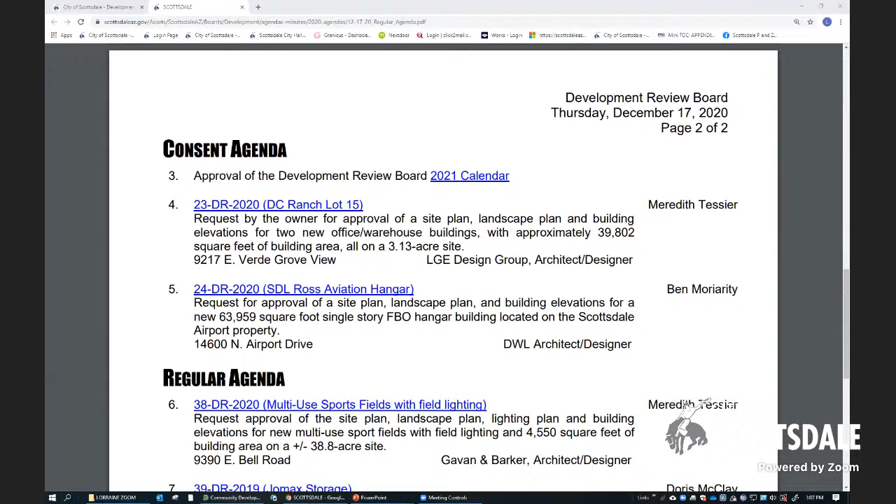Thank you. All right, we'll move on to the regular agenda, and we have item number 6, which is 38 DR 2020, multi-use sports fields with field lighting.

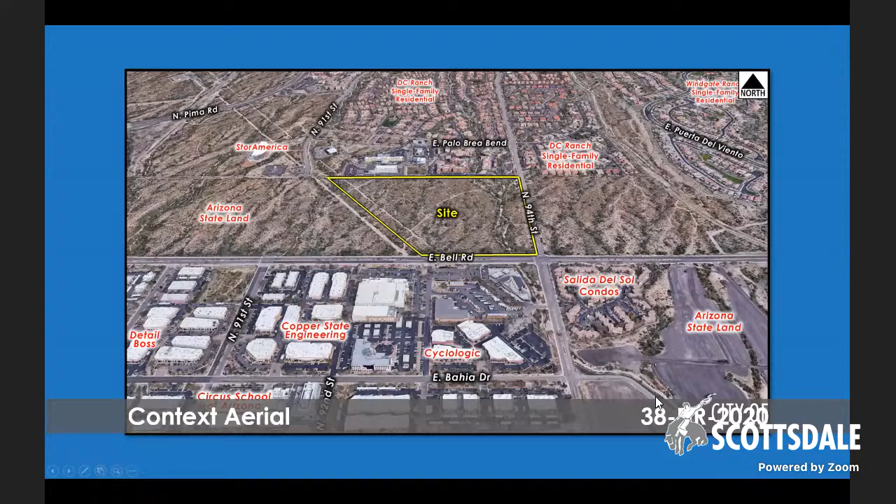Next slide please. The subject 38-acre parcel is located at the northwest corner of East Bell Road and North 94th Street, as highlighted in yellow.

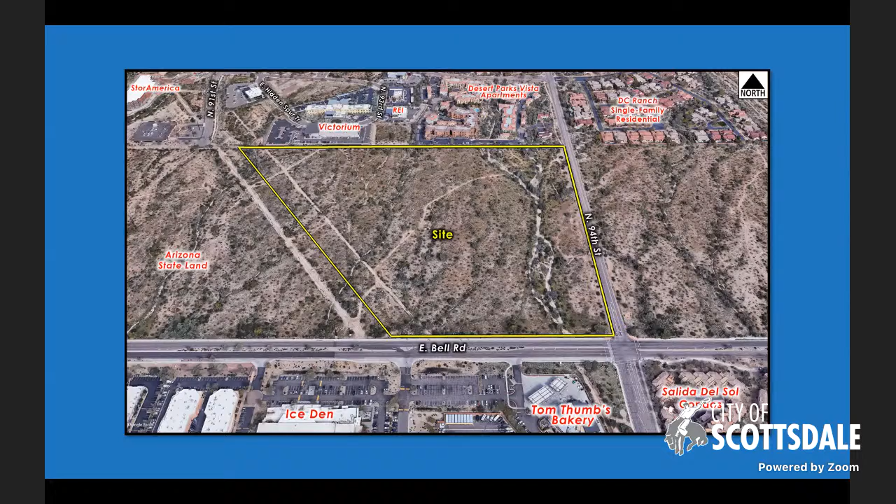Next slide please. Before you is a close-up aerial of the subject site with surrounding uses that include vacant undeveloped residential to the east, multifamily and light residential to the north, vacant undeveloped industrial to the west, and mixed commercial uses to the south.

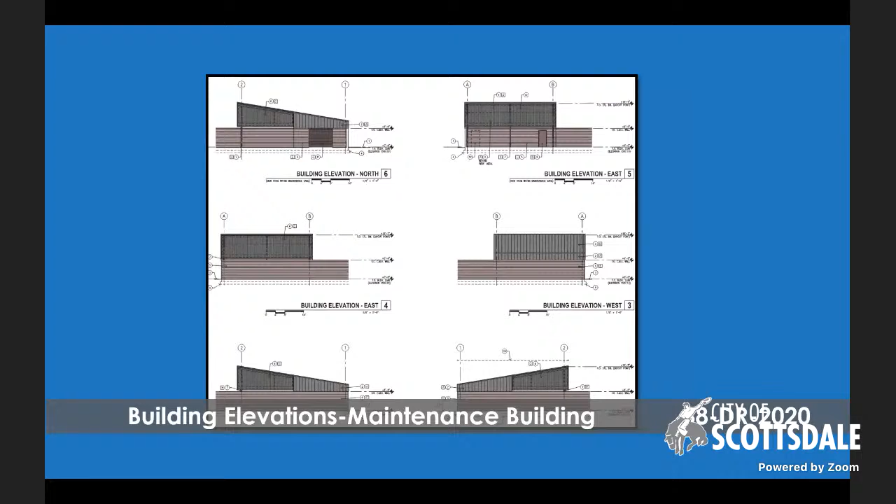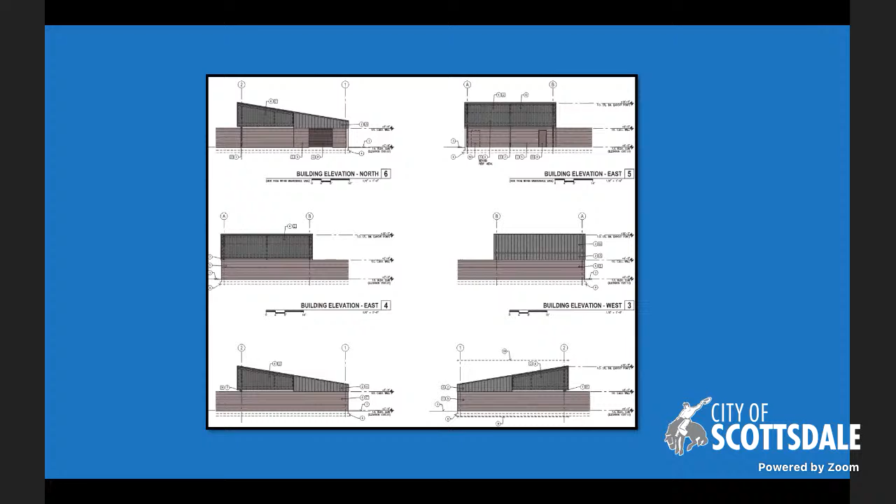Next slide please. Before you are the maintenance building elevations. Next slide. And the operation building elevations with materials and colors that are muted desert earth tones.

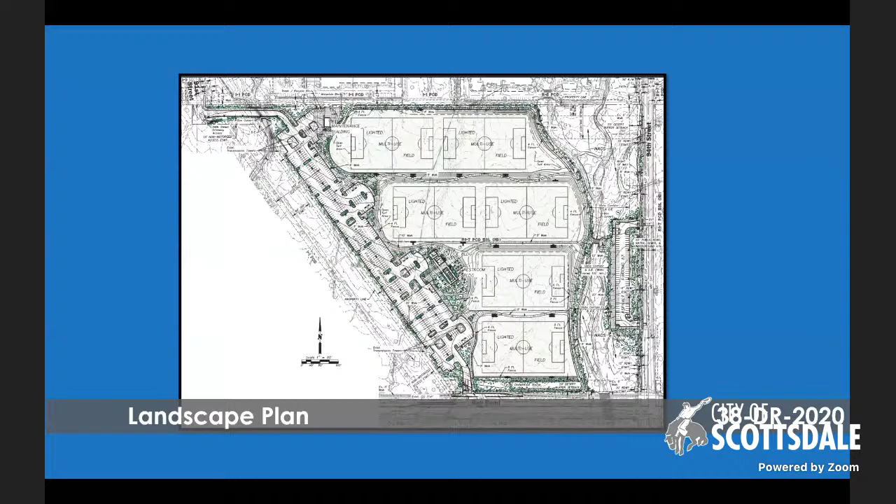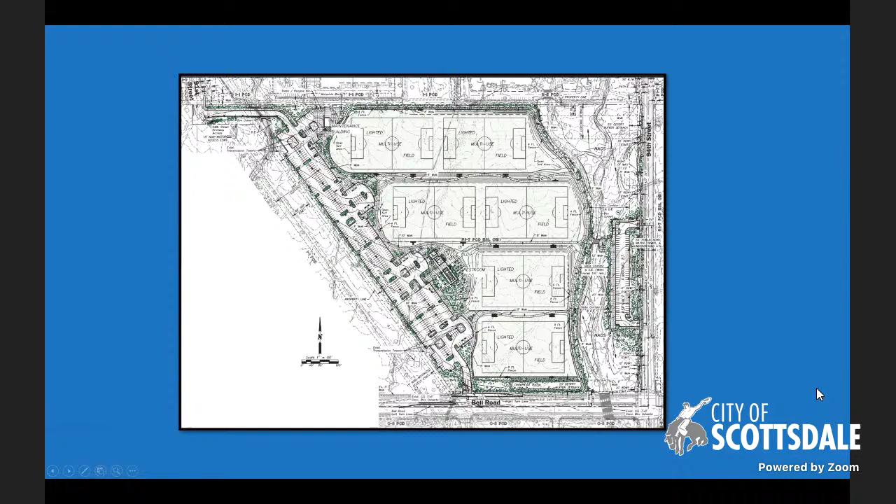Thank you. Good afternoon, board members. This is Croy Ekblaw with the City of Scottsdale. We'll be bringing up another PowerPoint momentarily here, and Lorraine, you can advance that.

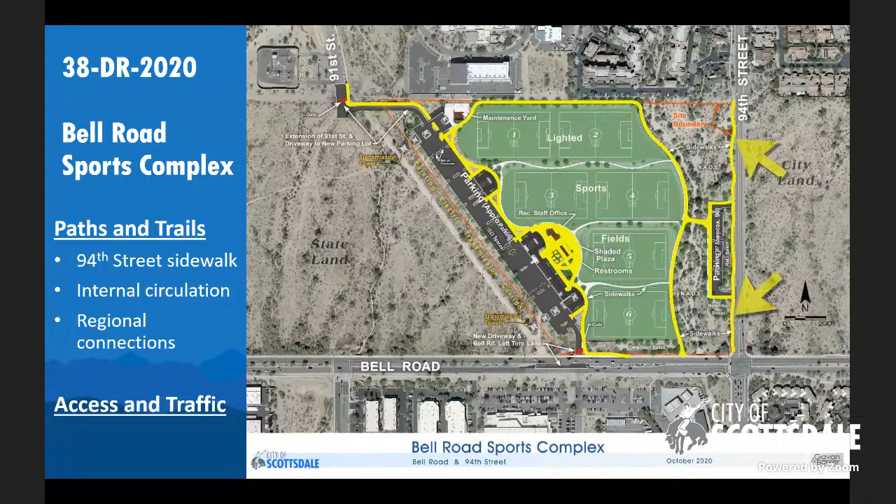Next slide. We've done extensive public input and feedback on this project, and a lot of focus was on access, traffic, paths and trails, and pedestrian access through the site. We'll have our site plan design team speak to that very briefly in a moment, but I wanted to emphasize, because when we were before the board a little over a month ago, there were some questions in particular about access and traffic.

This next slide highlights that we had Lee Engineering, one of our consulting team members, go through and do the traffic data collection and analysis, looking at traffic capacity on the surrounding streets and recognizing the offsite concerns from some of the residents.

And this next slide identifies the things that we've done. I know one of the questions last time was on the eastbound left turn lane. A typical lane would be 150 feet in length.

We're going with the 200-foot length in order to address the traffic needs, and we do believe that'll be satisfactory. The right turn lane will be a standard length, and being the city, we will continue to evaluate all traffic operations at that location, and if any amendments need to occur, we would be able to proceed with that. 94th Street, we have our access

provided without the need of decel lanes, and per public input and recent council approval of the municipal use site plan, transportation staff will be reviewing speed limits on 94th Street and monitoring pedestrian crossing interest at Palo Brea and 94th Street, which is north of the park site by several hundred feet. And then 91st Street had no roadway changes required.

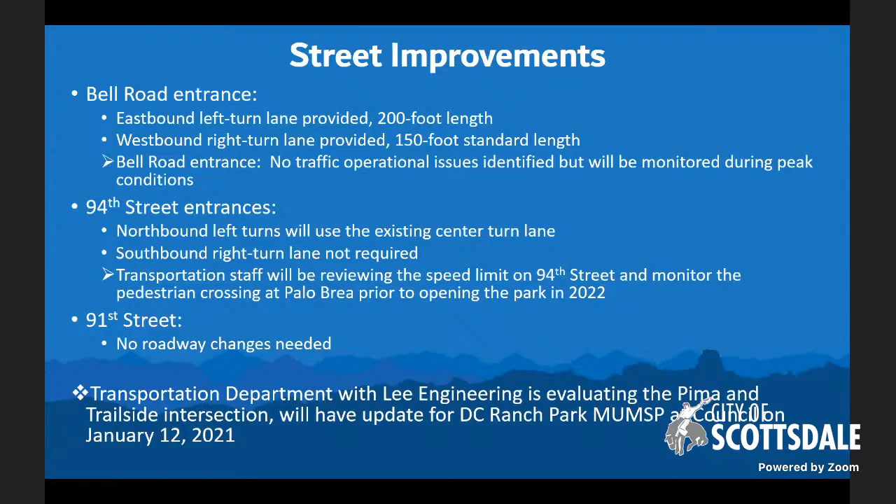So we just wanted to remind you of many of the elements that had been questions at your last meeting, and we have worked to address those as we went through the Planning Commission and City Council. The next slide then just reiterates that we've had extensive public input through a couple of open houses and all the public meetings that we've had, and the plans that are now being presented before you represent an evolution of those plans.

And with that, I'm going to introduce John Barker, who is our landscape architect and site designer on the site. John's going to take you through the next couple of slides on the site design. You go back one, please. Thanks, Croy. And members of the board, if you could please go back to that last slide.

Thanks. I know Meredith touched on several of these things, so I'll be brief, but just the main features again are the 6 soccer fields, turf fields, and the parking, approximately 600 parking spaces. The majority of it is underneath the power line corridor, and the small parking lot off of 94th Street.

We're preserving the large wash on the east side of the site, which is also designated as the Vista corridor. There's a maintenance yard and maintenance building at the northwest corner of the site. And then a restroom and staff office space centrally located within the fields.

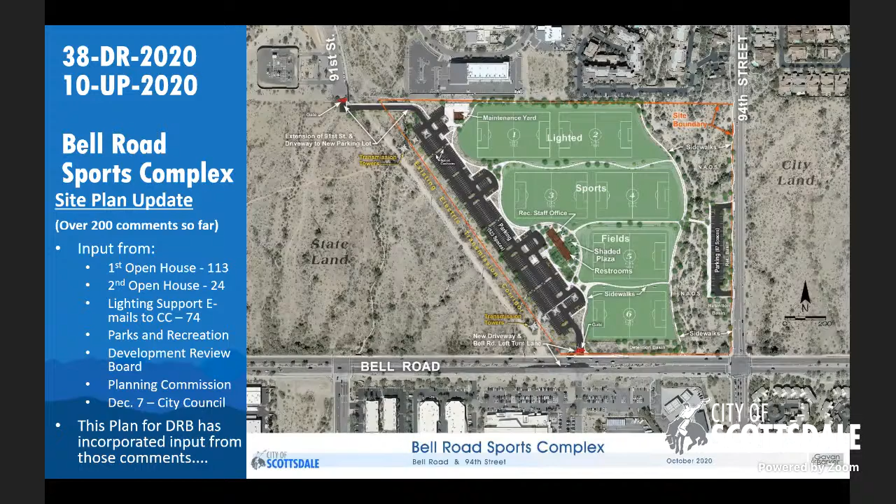The multi-use fields, the turf fields, are planned to be lighted. One of the initial concerns from the community was about the lights, and we've mitigated those concerns with the use of the latest LED sports lighting technology. The next slide shows the new technology compared to the old technology.

Some of the other comments from the public meeting were about providing a sidewalk connection along 94th Street from the north down to Bell Road. So that sidewalk is added, along with a lot of sidewalks throughout the site, connecting Bell Road to 91st Street, and also connecting all the fields with a perimeter sidewalk.

The perimeter sidewalk goes around an access control fence that surrounds the multi-use fields. It's generally a short 4-foot wire fence. There is some taller fencing along field number 6, the south field, and along the east side of fields 5 and 6, there's also a 20-foot netting positioned to catch any errant balls before they go into the wash area. Next slide.

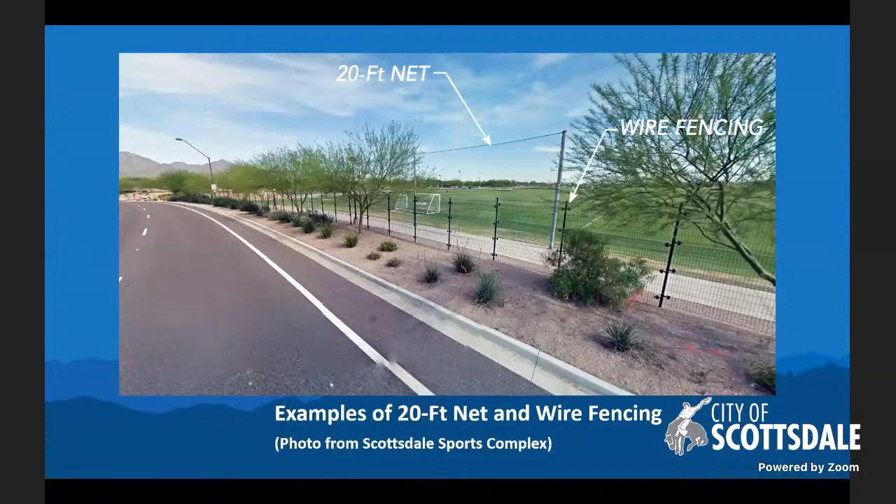This shows an example of the wire fencing that is proposed, which is fairly transparent, and also the netting that would be behind fields 5 and 6, behind the soccer goal. Next slide. That slide was taken at the Scottsdale Sports Complex. That's what's existing today. Next slide.

There are approximately 120 native trees that are being salvaged or have been salvaged. Some of them are extremely nice, large specimen trees. Over 40 saguaros and about 60 barrel cactuses, all of which will be transplanted back into the complex in the desert landscaping areas around the perimeter.

All of these plantings, the salvaged plus new landscaping, will be irrigated with reclaimed water along with the sports fields.

The power line corridor has its constraints, and it along with the wash on the east side have kind of guided the layout of the complex. Parking is a compatible use under the power lines, but unfortunately other things like trees, light poles, and other structures are very limited underneath the power lines.

The buildings, the two buildings on site, the maintenance yard building and the restroom office space, are just east of the easement, or the power line easement.

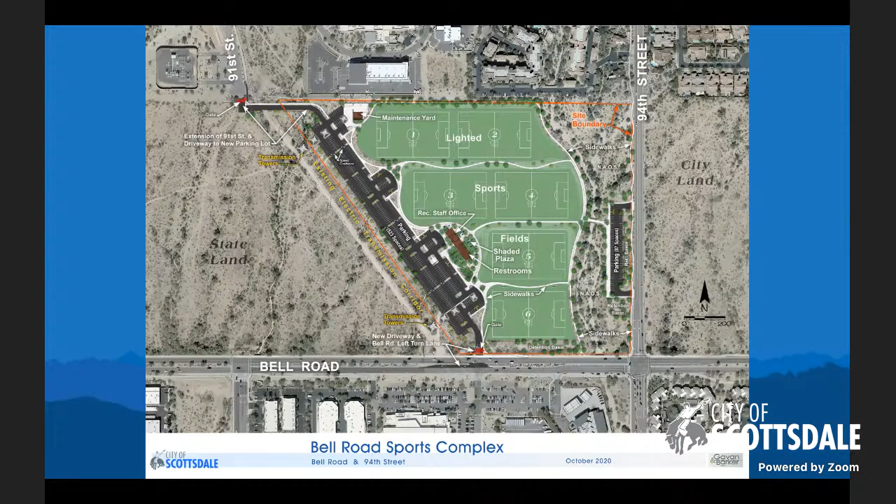The restroom space, let's go to the next slide which zooms in on the restroom. The office space and the restroom are under one roof, but they're separated with a breezeway that goes from the parking lot to a shaded plaza, and then also opens up to the fields for viewing, and also the McDowell Mountains. With that, I was going to turn it over to our project architect, Steve Pacello, to go into more detail about the buildings.

As John just mentioned, there are two buildings on the site, and this one is the operations building that houses primarily two functions: staff offices and public restrooms. As John said, the whole building is under one roof.

The way we've treated this building architecturally is as sort of a gateway into the complex. The staff offices, most of the building is somewhat utilitarian in nature, but we elevated its stature by treating it like a gateway, so there's a central breezeway that you enter through.

The staff offices, in the upper part of the plan, are in a central location for passive surveillance. It also has additional storage rooms and little service yards that we took a lot of care to incorporate and integrate into the architecture so they don't appear as afterthoughts. They're integrated within the roof massing to minimize the visual impact.

Most of the building is experienced on all sides, so we gave a lot of care to how we treat that. Most of the materials are metal for the roof, with some masonry use, and then we have other additional materials that embellish the palette.

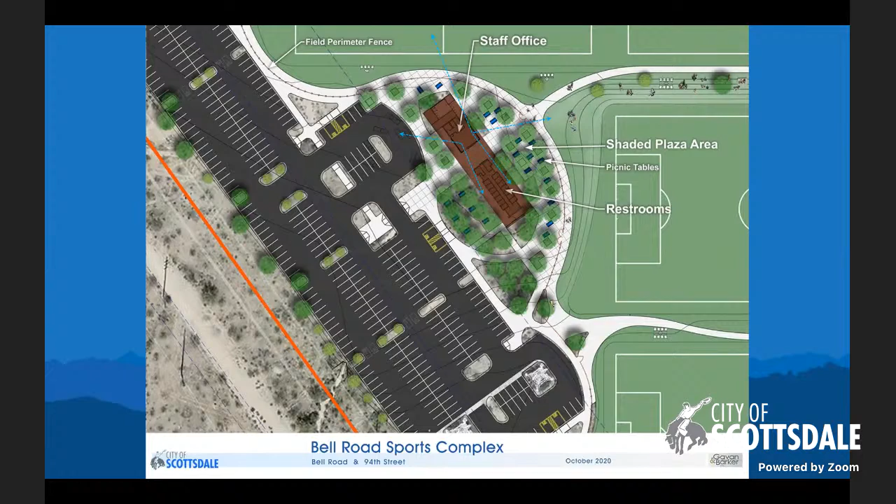We're using the tree bosque surrounding the building as part of our sun shading strategy, and we took care to do sun angle analysis to ensure that the glazing we're using in that area not only meets energy code requirements, but also becomes well shaded naturally within the architecture.

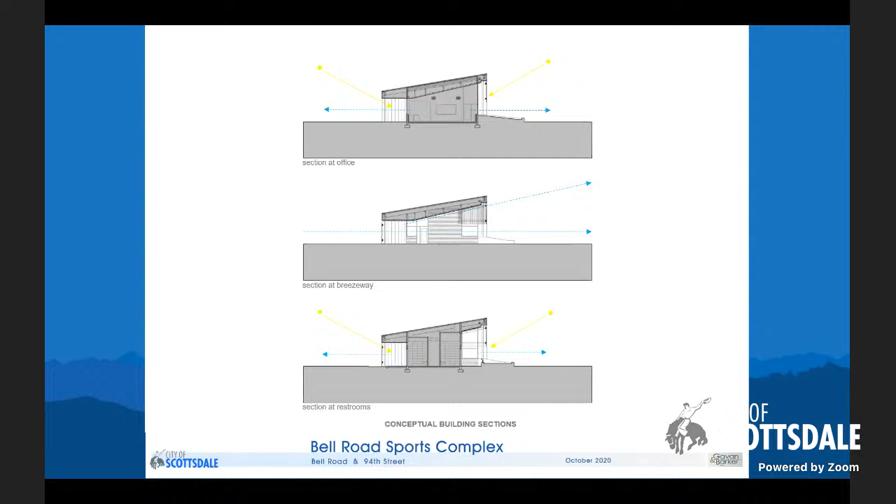The central breezeway is designed so that as soon as you enter, it opens up your views. We have a metal soffit area that conceals all fire sprinkler piping and backbone infrastructure, and gave a lot of care to sight lines and visibility to take what would otherwise be an ordinary restroom building and elevate it to make it a nice, pleasant experience within the complex. Next slide.

During the material selection, we took materials and studied them out on the site, and these are the two primary building materials: integral color masonry with a sandblasted factory finish, and a gray metal material that both complement the McDowell Mountains in the background, which were our primary source of inspiration.

The building appears very simple on the site. One of the unique features of the metal is that it not only meets the ESL requirements for glare, color, and chroma, but it has a matte finish, so whenever the sun shines on it from different angles, you don't get visual hotspots. Next slide.

This is the elevations of the operations building. The bottom is the southwest orientation, the middle is the northeast view from the park side, and there are two side views. The building elevations fit within the ESL requirements of 24 feet from natural grade.

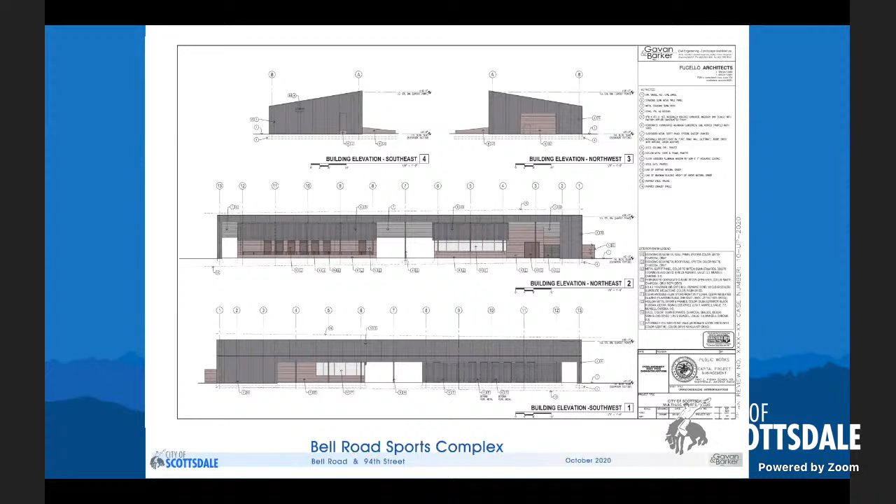We also gave a lot of care to considering its context to the DC Ranch area: a simple shed roof with metal standing seam on the roof that wraps down the walls, and underneath the building is integral color block, four inches high in scale, and other materials you'll see in our material palette, including a metal soffit area that's a lighter gray. Next slide, please.

The materials on the right are our sample board, and the digital submittal is to your left. A, B, and D is the metal siding. Color H is the exposed structural steel. Color C is the metal soffit underneath the building. And G is the steel doors and louvers that sit within the field of masonry, so it complements very well.

The glass that we selected works with our thermal envelope and our energy code compliance. We have integral color concrete that's slated to be used for a raised planter wall.

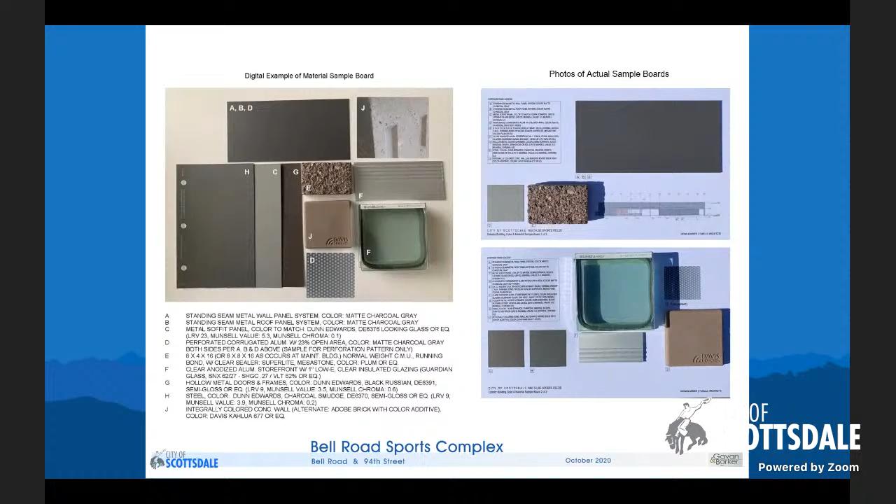Next slide. I should say the perforated metal indicated on that is for pattern only, not for color. The color of the perforated metal high in the elevations is to match the exterior metal skin color.

Next slide, please. Finally, the maintenance building sits within a yard surrounded by 8 feet of integral color block, the same as the building. Half of that building footprint is in an evaporative cooled space. The other half is a shaded area. Same exact materials used on the operations building.

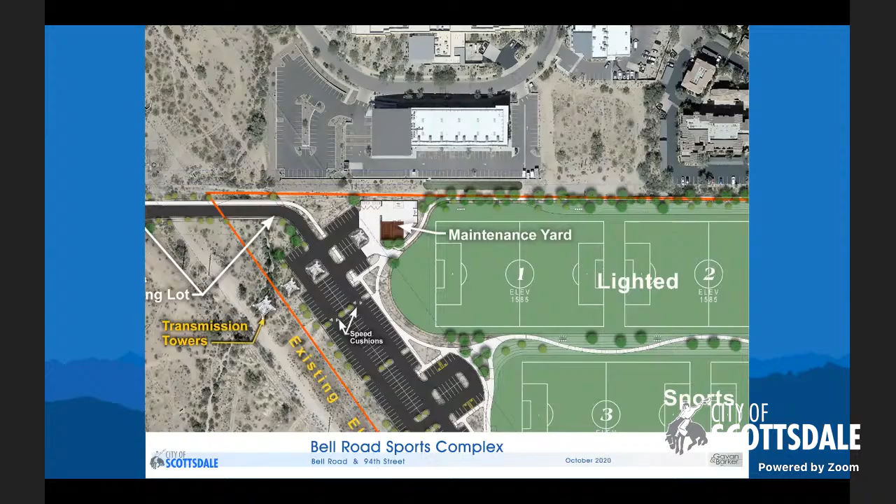Next slide, should be the last slide. And as these elevations show, same pitch of roof form, same perforated corrugated aluminum that's painted to match the metal, to provide enough shade and visual screening within the yard area. The masonry in this is an 8-inch high block, and we worked carefully to integrate the architecture of the maintenance building with the main operations building. Thank you.

With that, Councilmember Milhaven, that concludes the staff presentation, and we're happy to answer any questions and respectfully request approval by the Development Review Board of the Bell Road Sports Complex.

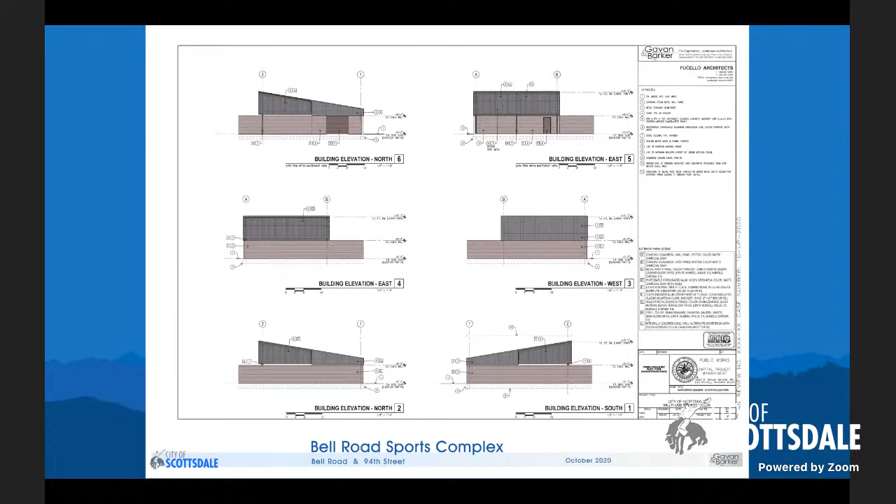I'm not so sure a 150 foot stacking bay is adequate to support that load. If it's not increased, what's going to happen in my view is traffic will bypass that turn lane because of congestion, and go to the intersection of 94th and Bell, make a U-turn, and go westbound again to that parking lot, which is really, really dangerous. So I'm curious as to the restrictions or obstacles as to why the turn lane stacking bay was not increased to perhaps 300 or 350 feet as opposed to 150. Thank you.

Councilmember Milhaven and Board Member Guskari, this is Croy. I'll start with the last question. We are taking that to 200 feet, that will be the dimension we propose. We do have Randy Dittburner with Lee Engineering that can speak to that. The standard would have been 150, and their analysis identified a minimum of 175, and we moved that up to 200. So we can go into that.

I do want to clarify on your first question, Commissioner Guskari, whether the reference you had, there were a number of comments in our early public comments about roller skating opportunities. Was that what you were asking about?

Yes, as a matter of fact, it is, Mr. Ekblaw. There were many comments in the previous presentation from the public regarding that, but it was scattered all over the place. But yes, that is the intent.

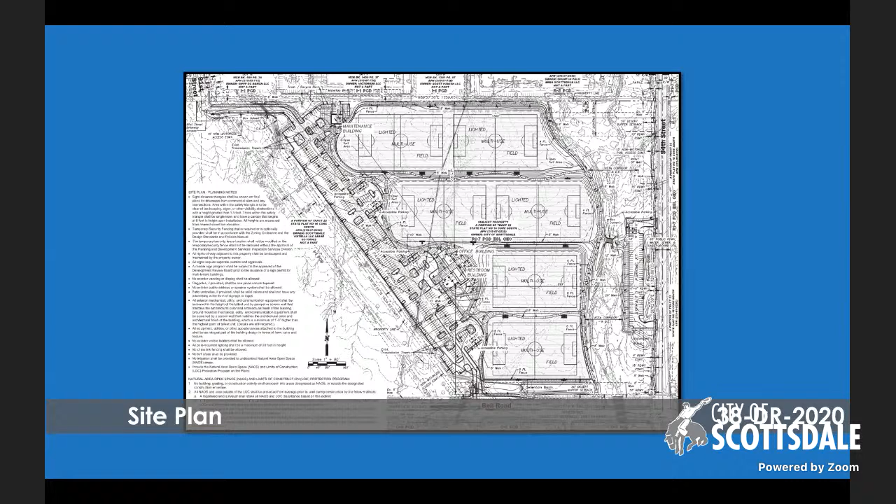Now, the issue really becomes - this is my own view, one person's view - is it really appropriate or fair or reasonable to sacrifice a quarter of an acre of NAOS open space at the interest and benefit of nurturing our youth and providing something for them to use? To me, the answer would be yes. Now, but then again, that goes at the expense of losing some open space, and I agree with your notion. I personally would think it would be appropriate to at least entertain and evaluate the viability of that option at the expense of losing open space.

I'd be interested to see what other board members feel regarding: do we preserve the open space allocation and let go of that opportunity, or do we provide that opportunity for the youth at the expense of losing space? Thank you.

Councilmember Milhaven and Board Member Guskari, if I could - as noted, this is part of the Bond 2019 program, and very specifically, the funding that we have for this round of improvements was specific to the multi-use fields and all the necessary parking and street improvements, pedestrian improvements to support that. So I think the appropriate thing, we understand your point, but we would need to do a further evaluation of whether it's this site or other sites that we have, and determine if there are needs to that effect of roller skating or other similar activities, and then come back with that, both from a funding standpoint and an appropriate site. We're not opposed to doing that, but it's not part of the bond and was not part of the municipal use approval that we have.

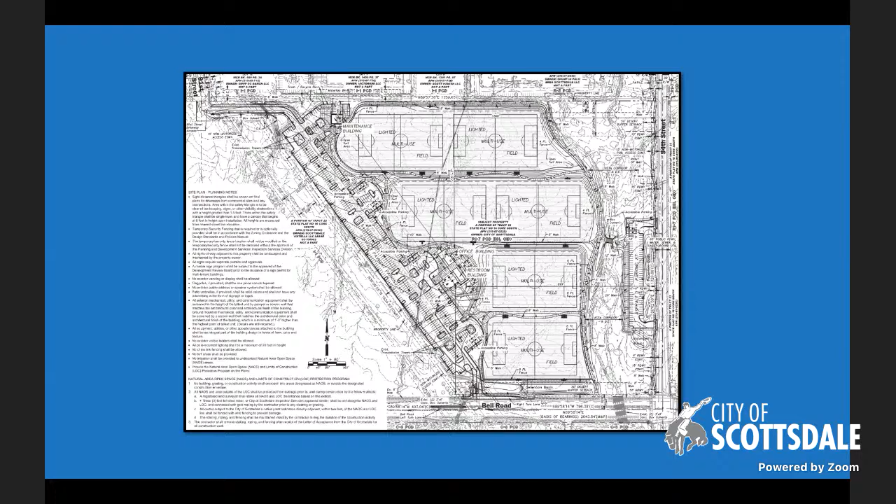Doris McClay with the Planning Department. Councilwoman Milhaven, Planning Commissioners, and DRB members, Doris McClay with the Planning Department, just waiting for my presentation to come up on the screen.

Doris McClay with the Planning Department presenting the Jomax Storage, case 39 DR 2019. This case was continued from the December 3rd Development Review Board meeting. The soils report, as requested by the DRB, has been submitted by the applicant and sent to the Development Review Board members. Next slide, please.

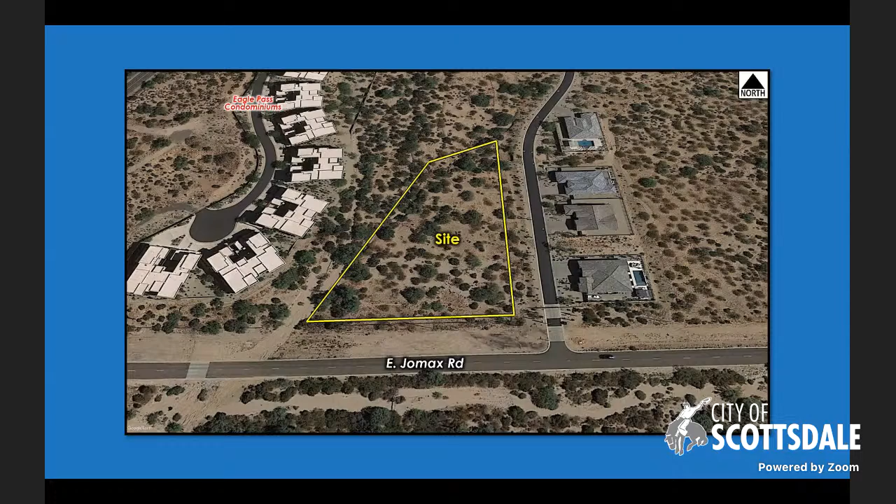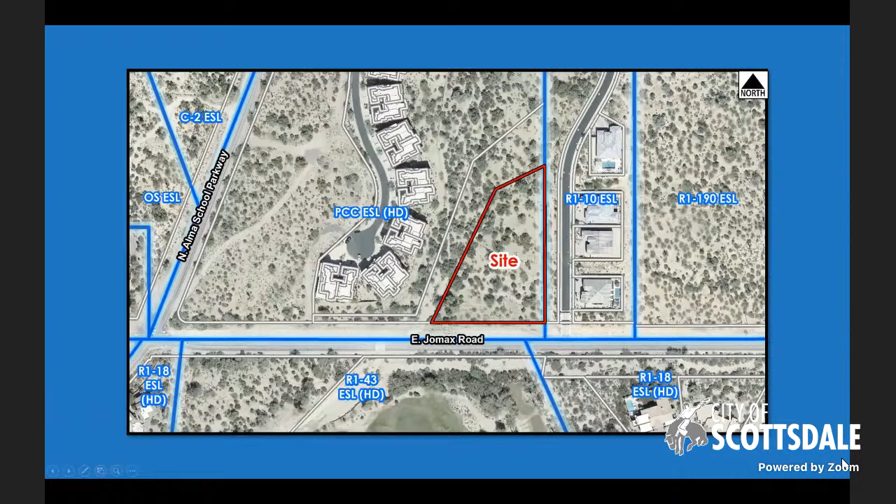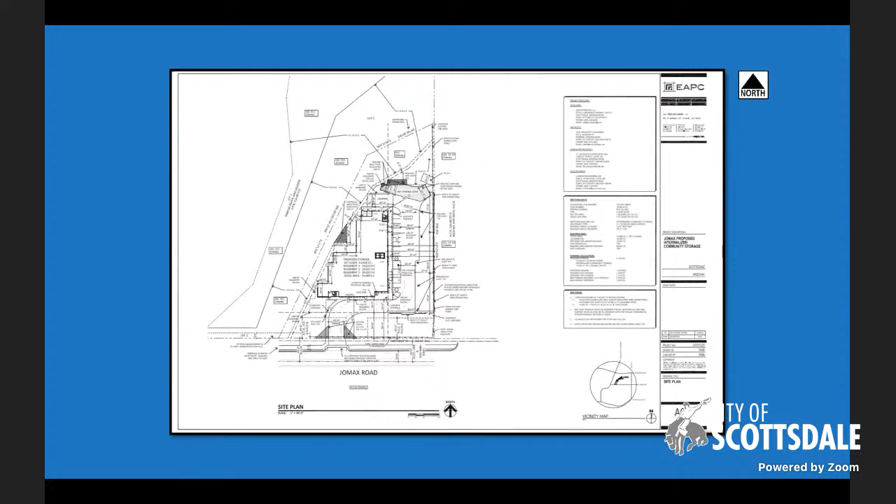The zoning on the site is Planned Community Center, Environmentally Sensitive Lands, Hillside District. Next slide, please. This is the proposed site plan for the internalized community storage building. The site plan hasn't changed. It's 1 level above and 3 levels below ground. Next slide, please.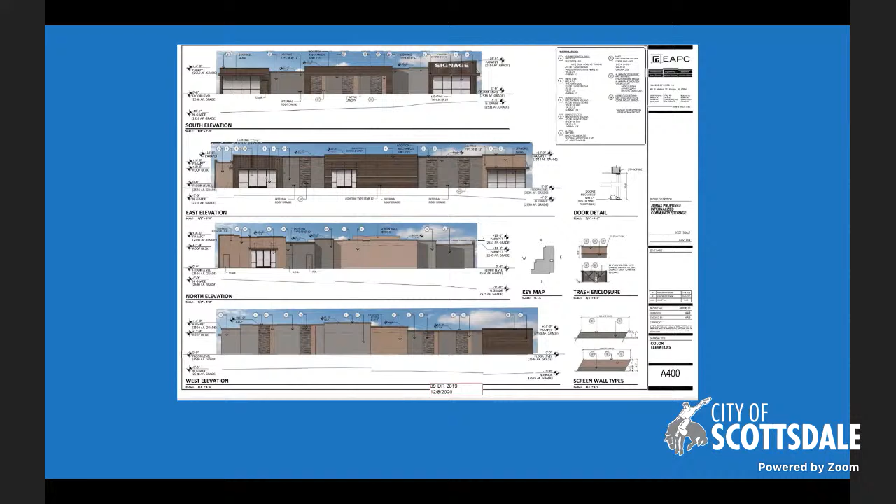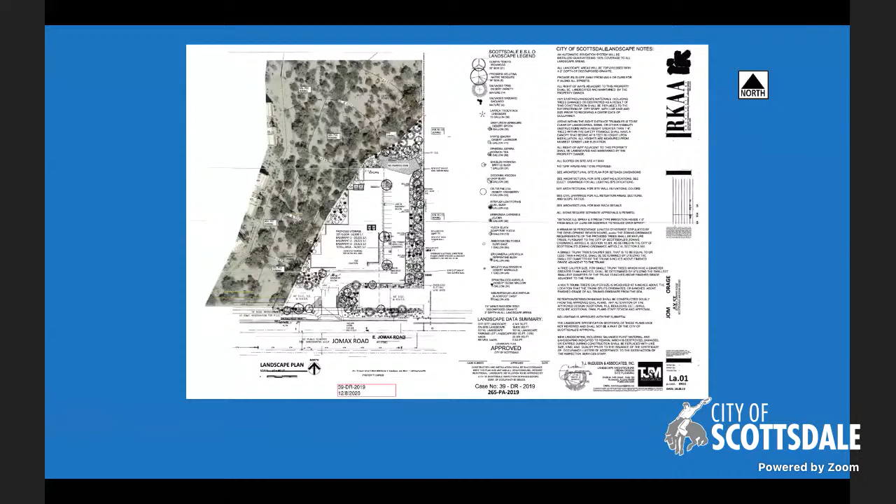Here's the building elevations. The west elevation has been revised and the stone has been changed to a new type of stone. Next slide, please. Here's the landscaping plan, which has been revised and shows more salvage trees on the west side of the property. Next slide, please. That concludes staff's presentation.

The applicant is here to make a presentation. Thank you very much.

Hello, this is Michelle with EAPC. Just checking to make sure I'm unmuted. Yes, you are welcome. Thank you, Councilwoman. Good afternoon, everyone. This is, as Doris mentioned, our continued hearing from December 3rd for the Jomax Internalized Community Storage Project. Next slide, please.

To follow up, this is the proposed location on the northeast corner of Alma School and Jomax Road. Next slide, please. And a superimposed aerial image here of our proposed project in between the condominium development to the west and the single family homes to the east. This site plan has not changed from our hearing 2 weeks ago. Next slide, please.

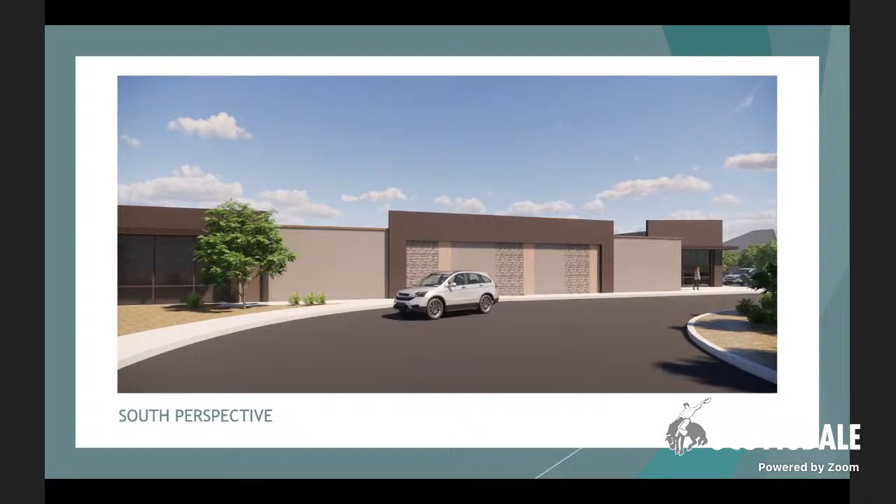Next slide, please. These next two slides were additional exhibits requested by the board, as well as the adjacent homeowners, to start looking at a line of sight from an elevation perspective of where our building sits and where the adjacent single family home residents sit.

So we have measured this out based on our building location, our parking, then our driveway space, the landscaping buffer we're providing, plus the landscaping buffer that exists today on the single family homes' property, the 110th Place driveway, and then the single family homes' driveways and their home.

We've done a few different line of sight angles, one showing an individual using an average height of about 5.5 feet from somebody's line of sight, if they were standing on their driveway looking directly at our building, where we would propose to keep the 12 to 14 foot tall mature trees all located on our side of the property, as well as trees that exist today on the Iron Horse Community single family home property and the ground cover.

I do know from recent conversations with the homeowners that additional trees have been added along this strip within the last couple of years, so I've tried to emulate those as much as possible. There might be some areas missing on the neighborhood side, but our side of the wall would be an entire screen of mature trees.

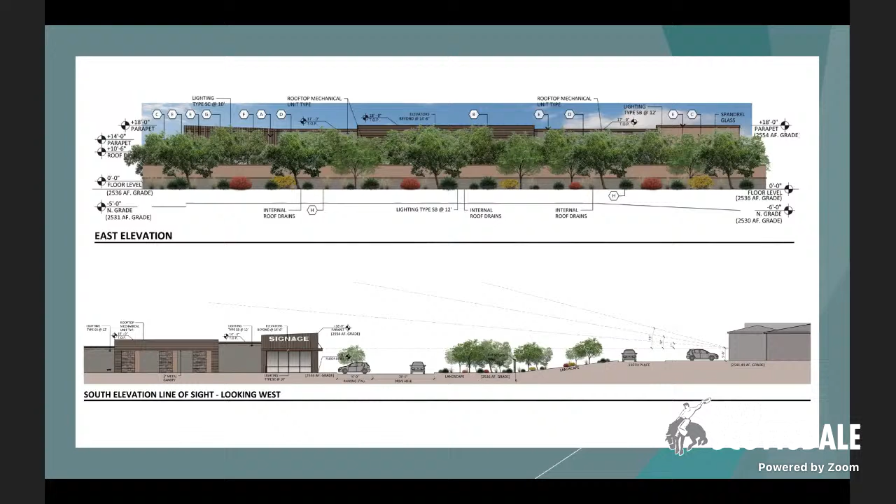This is the same type of exhibit that we did from the west side. It was a little bit more difficult to get the exact dimensions to the condos because the condos do all rotate and sit at different locations. So through our investigation, the primary building, which I am titling B here, and I know it's not the label of the building on site, I think it's actually O after talking to the HOA of the condo development, we primarily wanted to focus on the distance between the condo development and our west elevation, which is well into the 130 feet of space.

I've included these images on the top of this slide to show the development review board that this is the area of the wash that will be maintained and untouched for the existing shrubs and trees and cacti in this area. And then in addition, with the extra 20 feet, approximately 20 feet from our property line to our closest corner of our building, that 20 feet grows with our building steps on the west side, but we will be adding additional shrubs and trees along that west side to help screen.

And again, with the angles that the condo development sits at, the building B that I have depicted on this drawing is the most impacted, and if someone were sitting on their second story balcony, would again look directly out at just the top couple feet of our elevation due to them actually sitting lower, roughly 5 feet or lower on their property than our property, so their second story kind of acts in the same way as the single story on the opposite side acts for the east.

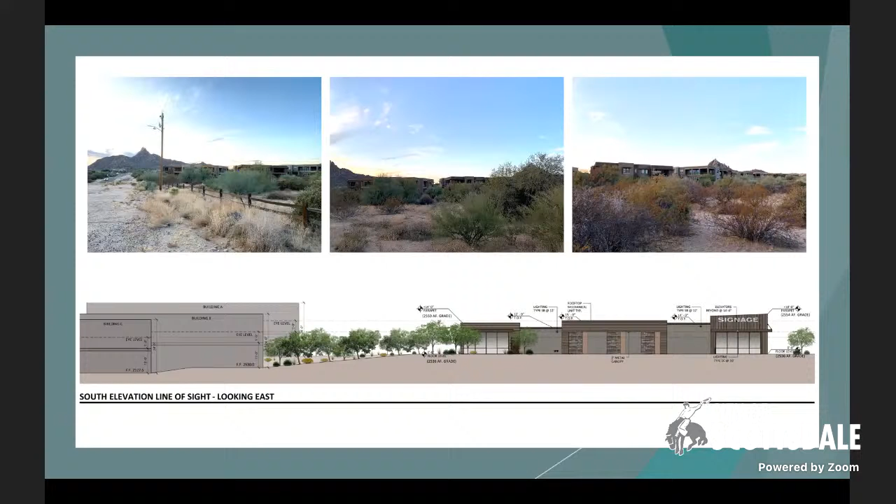This further depicts the distances between the condo development and our proposed project, as well as on the east side, the single family homes. For the condo development, as I was mentioning on the last slide, you can see building B looks diagonally straight at our west elevation. Building C, based on its orientation, there's only one corner in kind of the northeast corner of that building that really kind of skims the southwest corner of our property.

And then to the north, where I've depicted building A, they really look straight out into all of the preserved natural open space that we're providing, as well as the wash area that separates our development from the condo development.

And then on the east side of our property, we have included the extra landscaping space that will be filled with our proposed landscaping and salvage material, as well as the extensive setback that exists on the single family home site before you hit 110th place, which is approximately 100 feet of open space if you include the landscaping and the drive, 110th place drive, till you reach the single family homes.

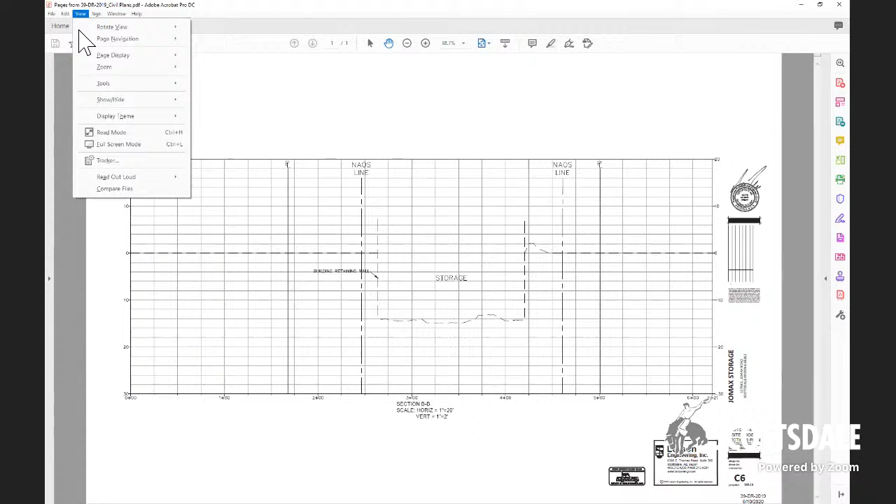For the perforated screen location, it is only located around the main office area in the southeast corner of the building. Behind it is an 8-inch block stucco wall that is painted the gray material, just adjacent on both sides of the metal screening. And then the perforated metal is anchored to the wall to create that extra elevation depth to the screen. Yes, that is on the screen right now, those are the very preliminary cut through drawings from our civil set.

Yeah, that's what I'm referring to. The civil, these type of civil sections are for figuring out specific civil functions from a grading and drainage standpoint. But this does not, and also these are not to the same scale horizontally and vertically as you would in a real life kind of site section. So these aren't very descriptive of what I was imagining. So continue on, sorry.

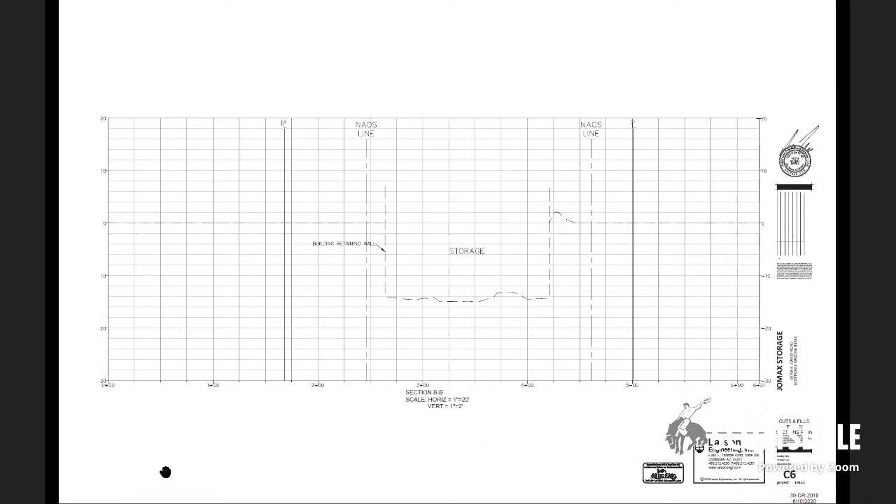From our packets, the site section that you are asking for is just simply not something we've been asked to provide by staff. So that's one reason we haven't added it in the design process, versus the full building sections that we will be providing in our building plan set.

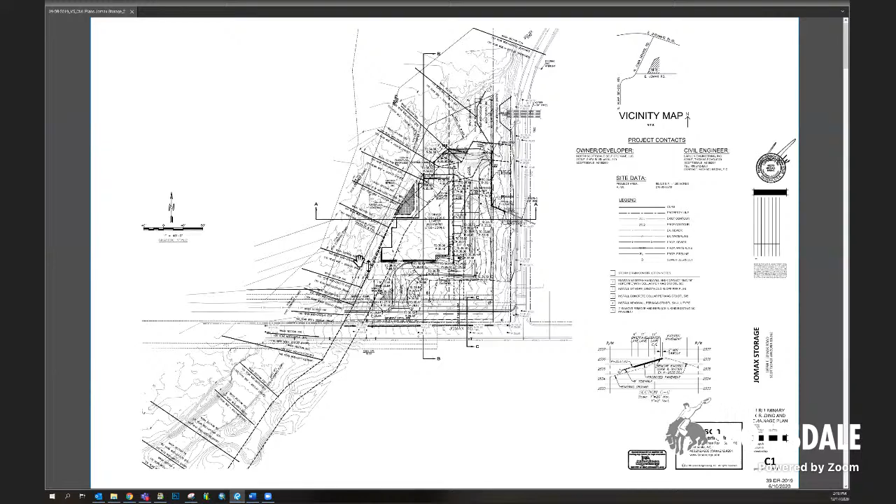For the metal screening, that was our location on that. For the shadows on the elevations, they are shown. We do have shadows shown on the colored elevations that were provided. I don't know if they're just hard to see in some areas, but they are provided, and primarily you see them on the north elevation.

From the west elevation, due to the angle that we took them on, the building sits at a different location. So I apologize, I was looking at the west elevation primarily when I was looking at that from the materials. So I do see it on the other elevations. I apologize for that.

For the shoring strategy, we are in very preliminary design since we haven't finished our building construction set yet, and sheeting and shoring is something we continuously work through as we look at the constructability plans of the project and work with a general contractor. Preliminarily, we've been discussing using soil nails to help shore the ground on all four sides of the property, and we would primarily have to come from the east side because you are correct, we are very close to the NAOS area on the west. So most of our sheeting and shoring would have to come from the other three sides of our property.

And then the roof line on the west - the west elevation roof slopes at a smaller building height than the east due to the natural grade. Because we are in an ESL overlay district, we are only allowed to have our building 24 feet tall from the current natural grade level. So because of that, in certain areas of our building, we've had to lower the parapet in order to stay within that natural grade building height limitation, which puts the southwest corner of our building at the most impacted area.

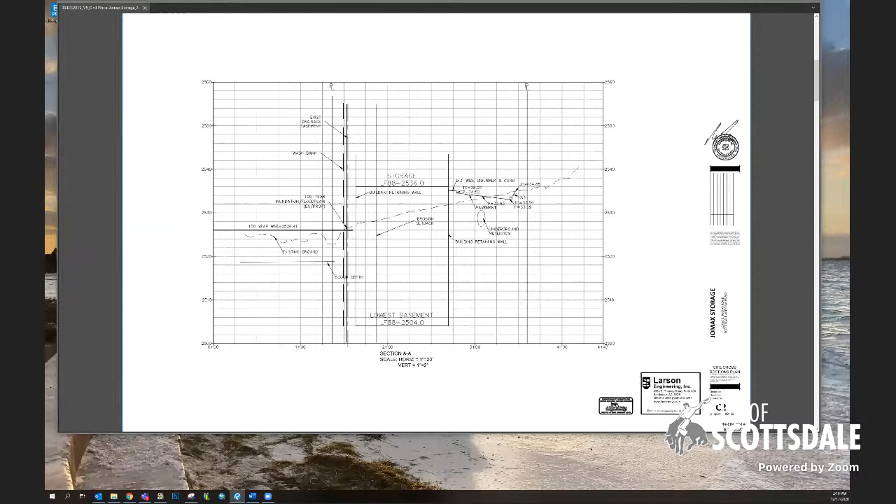Could that be done without exceeding the 24-foot limit that was mentioned? I'm assuming that it could, because it would be an extension of the wall directly north of it, so I'm assuming it would be in line with that. I'm going to go back through the package that I have right now.

Is this something you might be agreeable to? The applicant responds: we're agreeable to extra screening.

However, if it's part of the physical building wall, like raising that building wall or an element attached to the parapet wall, such as what we're showing on the east elevation versus the west, that exceeds the 24-foot limit and isn't allowed. An actual screen wall mounted on the physical roof surface to conceal the units is allowed, per the City of Scottsdale design ordinance requiring full screening of mechanical equipment, whether by building parapets or additional roof-mounted screening.

That's why on the west elevation there are some really low building walls, and why we intend to add extra roof screening around the unit. All three other sides of the property have screening around them, but the west elevation would need some extra screening added.

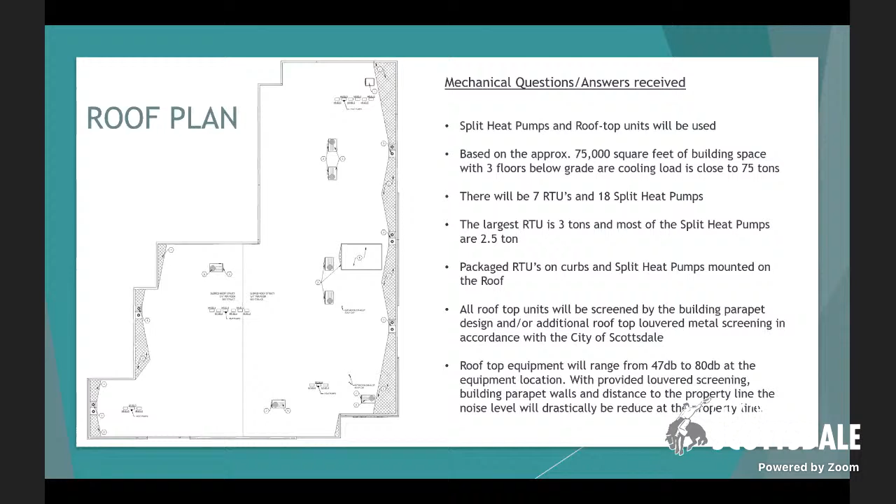So yes, we are showing truck turn radiuses through our site. These radiuses meet emergency vehicle standards as well as the largest U-Haul truck standard. At the north end of our property we have a loading space designated for moving vehicles, as well as a turnaround for refuse and fire emergency. We've looked at that, and staff has reviewed this plan to meet those standards. Over the course of our development, that north end turnaround has changed based on comments we've worked through with city staff, fire, and transportation. If you don't mind, show the site plan on the screen.

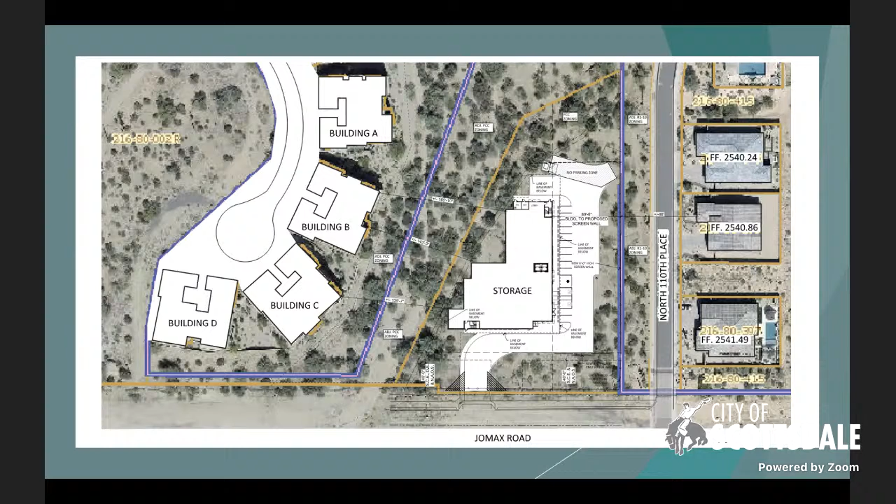So this outer radius you show on the driveway, what are those dimensions?

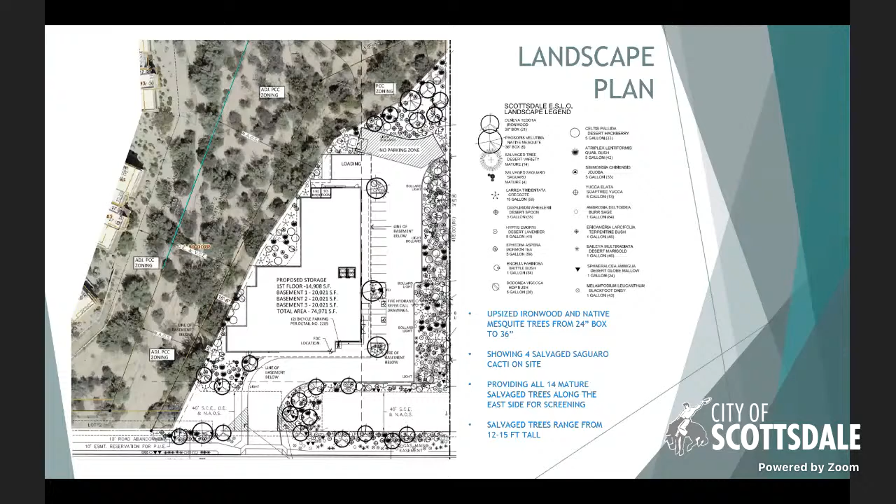So those are 35-foot radiuses in that whole north end of the property. Understood, but I'm talking about the entrance. You had one drawing, I think your site plan shows a fire truck circulation on it.

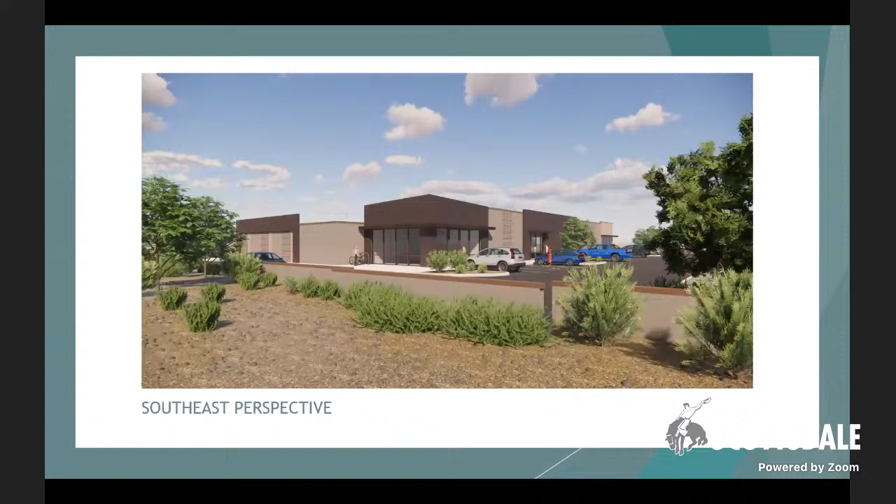Yeah, so on this PowerPoint application, the only site plan is the aerial showing the site plan embedded in it, but the actual site plan was part of the packet application, so I don't have those radiuses called out. That is something I can have staff follow up with you on, but I do know the fire truck radius was planned at an outer radius of 55 feet, and the curb is even wider than that, just past it for the entryway.

I'm sure staff will work with you on this piece of it. The other item I have, and I think Jeff mentioned earlier, you're literally building next to an NAOS. You're going down 32 feet based on your section, and removing dirt about 36 feet. And I know you mentioned nails.

Nails doesn't work here. You have wash just west of here. And the shoring of this project is going to be extremely difficult and expensive, overly expensive. And then, just by quick calcs here, you'll be removing about 30,000 yards of dirt.

This is almost like $500,000 just removing dirt without even starting. So have you guys looked at those methods closely? Because the site looked really tight. And when I start looking at how this fits the surrounding area, is it something we'll be able to go forward with when it comes to construction?

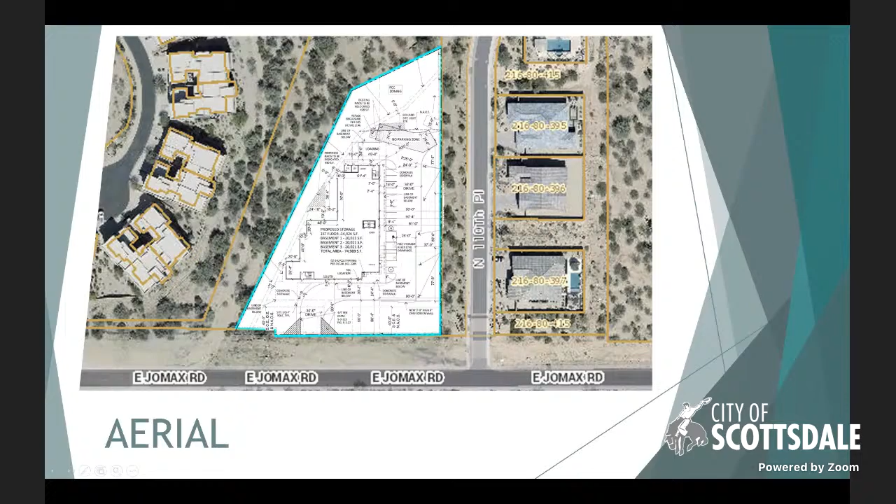Board Member Gushgari. I want to circle back really quickly to the building height elevation. Not that we haven't spent enough time on it, but if you look at attachment number 17 of the package, it basically says the proposed development proposes a maximum height of 24 feet exclusive of rooftop appurtenances.

But when you look at the exhibit before us, it shows that the maximum height is 18 feet. I assume the 18 feet is off of the proposed finished grade, not the existing finished grade. Is that a fair statement? That's correct. The 24-foot building height limitation is from natural grade. So to meet that number from our finished grade elevation, our max height is really 18 feet.

So what would the total height be when you include all the rooftop appurtenances? They all stay within the 18 or less height. The couple units in question on the west side are at roughly the 15.5, 16-foot height limitation. But as you base it off the existing ground, the lowest existing ground, what would the total height be? So it's about 16 feet from that lowest ground, but the parapet height in the lowest ground is only 14, based on the limitation of the natural grade in that area. So we have a couple feet of those units that peak above the building parapet that we're allowed to have.

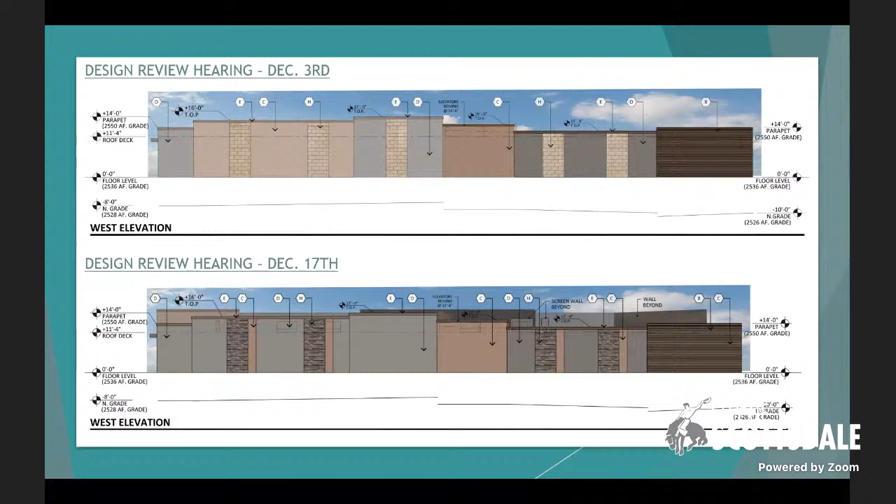I know there were questions in our packet and mentioned here about traffic. I think compared to a lot of other uses that could go here, this is a pretty low traffic use. I know transportation has probably taken a look at the road over at Joe Max to see if something needs to be done there, whether this is built or not. Same thing with the questions about power lines and utilities being undergrounded.

I know there have been conversations with staff, and I guess the major question I have—since there's been a lot of technical issues brought up in the meeting today—is more of a procedural one for staff: where do these things get ironed out? If something were to be approved today, could these issues be ironed out after the fact, or is it more important for us to get all these ducks in a row before we put an approval forward?

Councilwoman Millhaven, this is Brad Carr and Commissioner Smith. I mean, you could handle that two different ways—you could direct staff to do more work with the applicant post-approval on some of these items. But from what I've heard today, I think the board is looking to have a little more of that information provided before they go to the approval stage. We have done it in the past, working with applicants on additional items still outstanding after approval, but generally we see board members looking for that information prior to an approval.